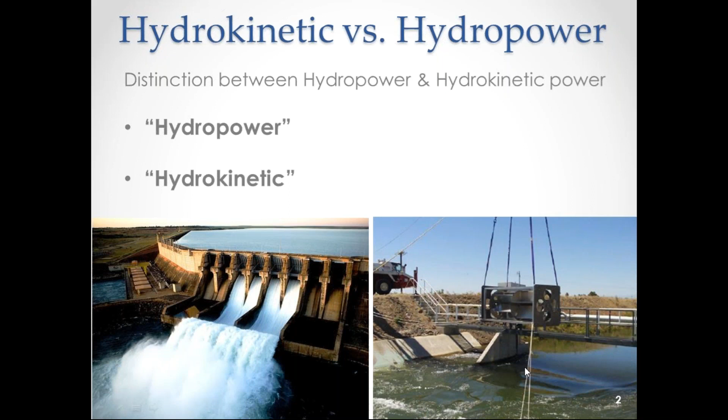That is the potential energy in terms of hydropower, and kinetic energy in case of hydrokinetic. But here I tried to highlight the difference based on structural aspect in order to cover the environmental aspect as well. So guys, we know that to harness hydropower, whether it be a dam or a run-of-river project, we make huge structural changes in the water body and its surroundings. Whereas for hydrokinetic, it's relatively very simple to install. So this is my opinion of differentiating them, but mainly it's based on the conversion of type of energy, that is potential and kinetic energy.

So let's come to the basic theme of our presentation. Hydrokinetic submersible turbines, also called water current turbines, or in some cases in-stream turbines. Though the technology is new, these turbines are getting interest in many parts of the world. Two main areas where hydrokinetic devices can be used for power generation are: tidal currents or ocean waves, a technology that attempts to harness energy from ocean waves or tides; and river streams, ocean currents or canals, a technology that attempts to harness energy from river currents and streams. Although both use similar technology, we will focus mainly on river stream current.

As we know, the history of harnessing the natural power of a running stream is quite old, when people used to grind grains, and later on for electricity production for many years. Anyways, our focus in this presentation would be on rivers.

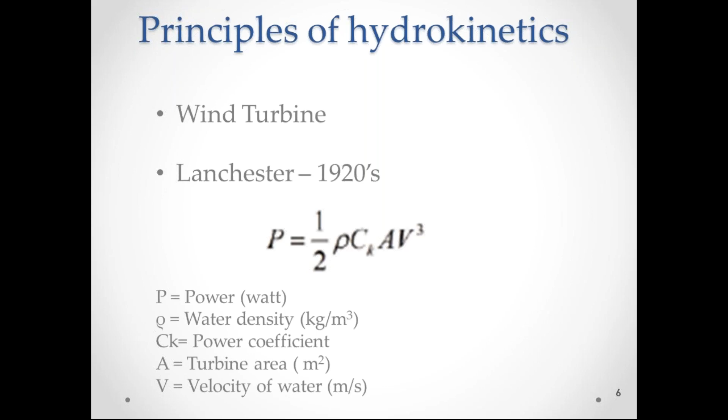Well, let's discuss a little about the technology and conversion approaches. Several hydrokinetic conversion concepts have been developed over the years. The two most common small-scale hydrokinetic turbine concepts are axial flow turbines and cross-flow turbines.

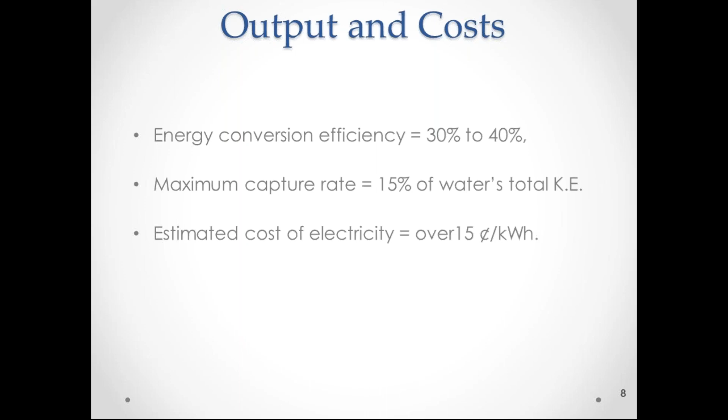In comparison to many other technologies, particularly renewables and green energies, hydrokinetic turbines have more benefits with lesser environmental impacts. In terms of output, hydrokinetic is a more predictable source of energy than wind power. No retaining structure is required for installation of hydrokinetic turbines. Similarly, very few or almost no civil engineering works are required.

These turbines are discreet or even invisible due to their components being near total or fully immersed. There are zero greenhouse gas and atmospheric contaminant emissions associated during installation as well as operations. There is no major habitat modification, including benthic organism habitat. Similarly, no considerable modification of vegetation and possible impact on aquatic fauna is noticed. Small environmental impacts are seen over the facility life cycle.

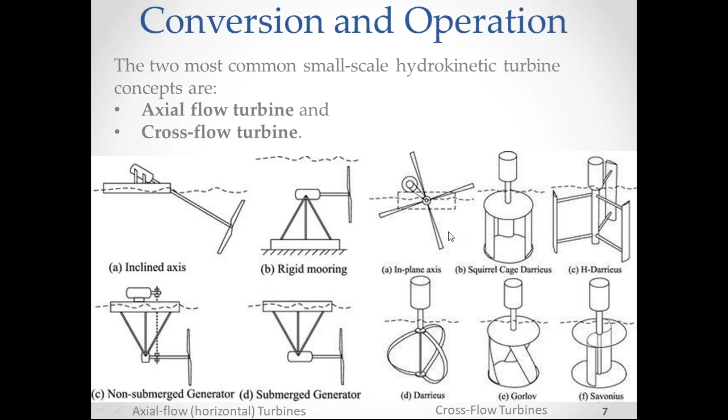Please. Sir, actually, in my fourth slide, I mentioned this point as an opportunity for our region. In fact, this would be sort of my recommendation for SAARC member states. As I mentioned, SAARC member states, like any developing countries, can manufacture and implement the technology to supply needed electricity to their small communities and villages, in case of off-grid options or domestic supply. So obviously it is indeed the most attractive part of this opportunity.

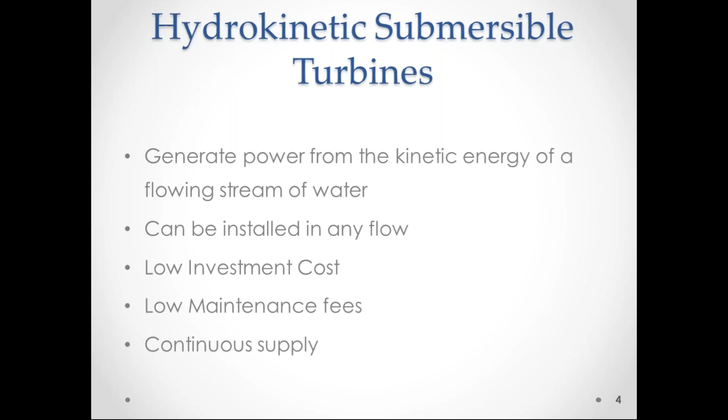And it has no rocket science, it's a very simple concept. The same small hydrokinetic turbines which we use for potential case, we can use with small modifications, as at the same time, as I mentioned, it's basically the same as wind turbines except for the density difference. So you can simply say that if you put a wind turbine in a canal, it can give you this opportunity, although that's not a logical solution, just to make a case.

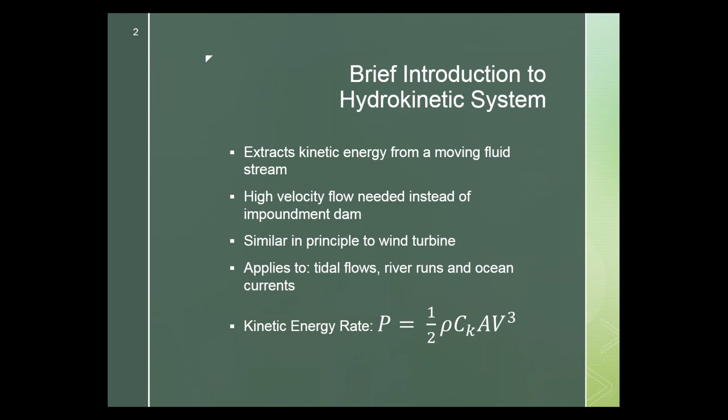When the turbine is submerged into the water, the flowing current turns the turbine, and the coupled generator rotor spins along with the turbine shaft. If an induction machine is used as a generator, then a gear is also required between the generator and the turbine to produce the corresponding frequency during lower water speeds. The gear is needed because the flow of the water is lower than that required for generation of electricity, so a gearbox is coupled with the generator to make use of the lower speed of the water stream.

However, a permanent magnet synchronous generator is usually connected to kinetic turbines because it does not need a gearbox and can be connected directly.

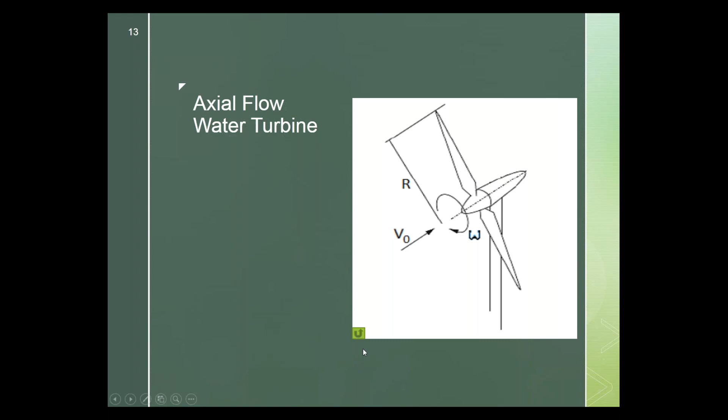Within the axial flow turbine, there are further classifications such as inclined axis or horizontal axis. The inclined axis turbine has mostly been studied for small river energy conversion applications.

In both axial flow horizontal axis and cross flow axis turbines, the sweep area tends to be relatively small compared to the total dimensions of the device. But in the inclined axis turbine, the sweep area of the rotor blades is increased by giving an inclination to the turbine rotors. If we expand the size of the turbine, it would lead to considerable increase of the supporting structures and structural strength at the root of the horizontal axis turbine, increasing the overall cost of the system.

Therefore, in the inclined axis turbine, the turbine's axis swings across a pivot on a supporting structure or on a float. This option reduces the cost, and because of the higher swept area of the rotors, it gives better efficiency as well.

The inclination angle of this turbine is passively adjustable to the stream speed, determined by the balance of hydrodynamic forces, buoyancy, and weight of the turbine. For maintenance, the turbine axis swings near the water surface by being pulled up at the lower end using a cable outside the system. This is easy to use, but it is mainly used for very small power generation applications, so large inclined axis turbine systems are not possible.

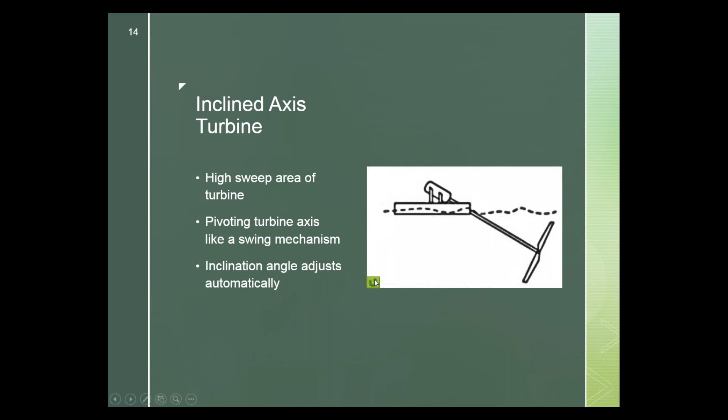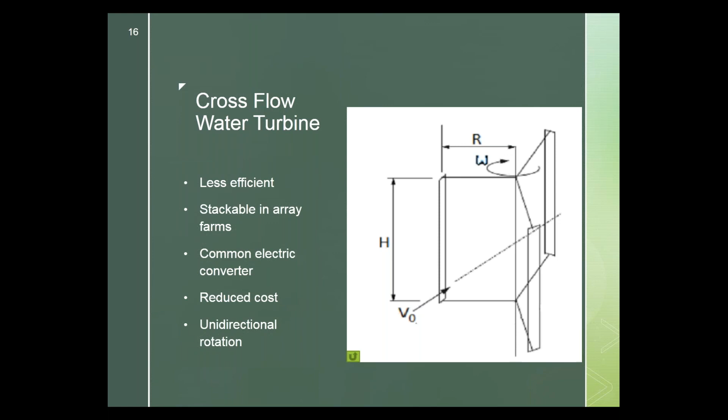However, some advantages also exist. For example, compared to axial turbines, cross-flow turbines can rotate unidirectionally even with bidirectional fluid flow.

Within the cross-flow turbines, there are in-plane axis and vertical axis cross-flow turbines. So I would be giving a very small, brief overview of these turbines, and then I'll be finishing my presentation. These cross-flow turbines can be divided into the vertical axis, in which the axis is vertical to the plane of water, and the floating and in-plane axis. So this turbine is the in-plane axis, in which the axis of the turbine is on the horizontal plane of water surface, while these are vertical axis.

The rest of these are vertical axis turbines, where the axis of the turbine is vertical to the plane of the water. These are mainly drag-based devices and inherently less efficient than their lift-based counterparts. The large amount of material usage is another problem for such turbines. Darrieus turbines with the in-plane axis may also fall under this category. In the vertical axis domain, Darrieus turbines are the most prominent options, even though examples of H Darrieus or squirrel cage Darrieus are rather rare. But instances of Darrieus turbines in the form of curved blades are also being used in hydro applications.

The Gorlov turbine is another member of the vertical axis family, where the blades are of helical structure. Savonius turbines are another example, which are drag type devices, which may consist of straight or skewed blades. These turbines may also be classified based on their drag and lift of the blades, their up and down flow orientation of the rotor, and fixed or variable pitching mechanism of the blades. Different types of rotors may also be converged to make a hybrid, such as a Darrieus Savonius hybrid, in order to achieve a specific performance feature.

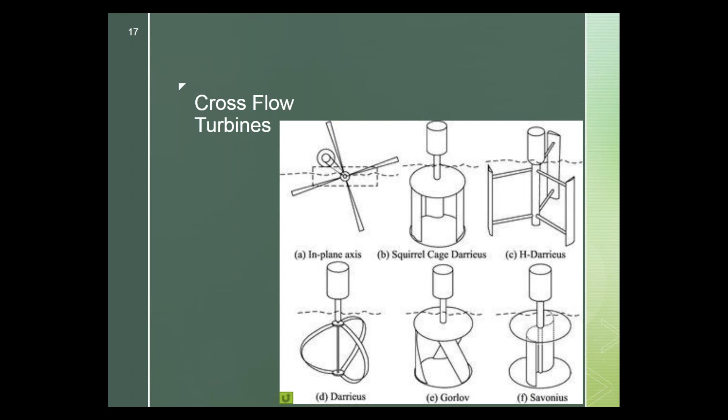So with this, I would be ending my presentation. We still have some topics to cover, which is regarding the augmentation of the turbines through ducts and diffusers, the most viable turbine option, types of system generator for hydrokinetic turbines, and then finally the different technologies which exist in the market currently. So hopefully we would be going through that later in whatever slot I get to present to you guys. So thank you very much, and over to you, Mr. Hassan.

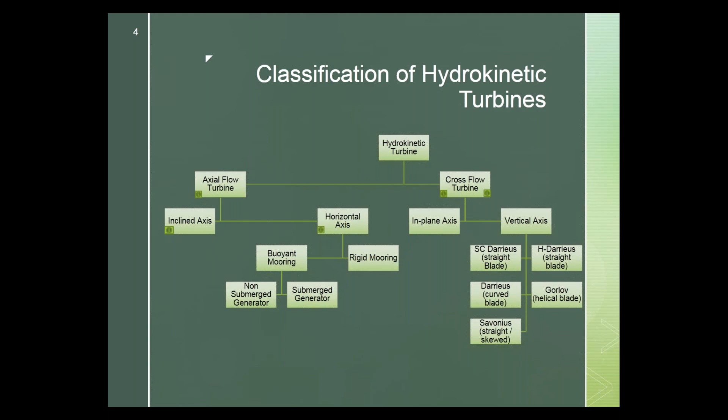Thank you very much, Umar Saab, for your very nice presentation. Mr. Umar has briefly touched on the technical formulas and the types of hydrokinetic submersible turbines, giving an analogy to the wind turbines, and it was very interesting to see how this formula of wind turbine is also working similarly on this technology, with the density difference being the part. Then he has also touched on the structures of hydro submersible turbines with generators and specific parts. And lastly, he has covered the classifications of the different hydrokinetic turbines available.

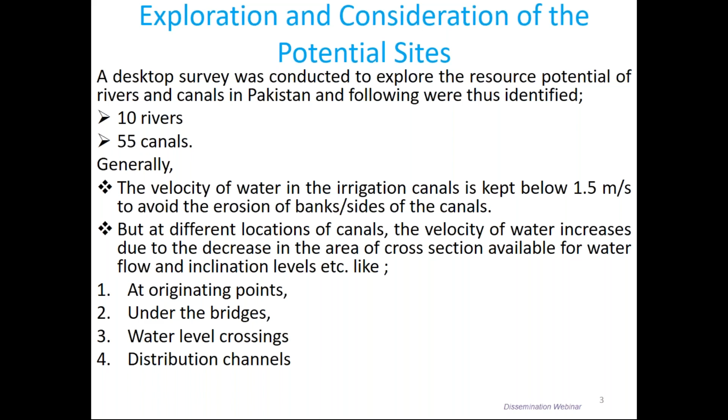But at different locations of canals, the velocity of water increases due to the decrease in the area of cross section available for water flow and inclination levels, etc. Like at the originating points of canals, under the bridges, water level crossings, and distribution channels. Those points are typically most suitable for the extraction of this energy through hydrokinetic turbines.

So, going through this desktop survey, we came to the decision that the Ghazi Brotha power canal originating from Ghazi town near Tarbela Dam was the top of all 55 canals and rivers we came across. Here we can see the beautiful view of this canal, because this canal has been designed for the purpose of potential energy extraction from the water available in Tarbela Dam, and they built this water channel, and 1450 megawatt energy is being extracted through this channel.

Now we look at the parameters of this canal. Water flow velocity in it is 1.8 meter per second, which is useful and comes into the range of water velocity which is good for most types of turbines. And depth of this canal is 9 meters, which is also a very good depth, and up to 8 meter height of turbine or blade area can be accommodated in this canal. And the width of this canal is 100 meters, which is also very good, so that in line we can install many turbines. And length of this canal is 52 kilometers.

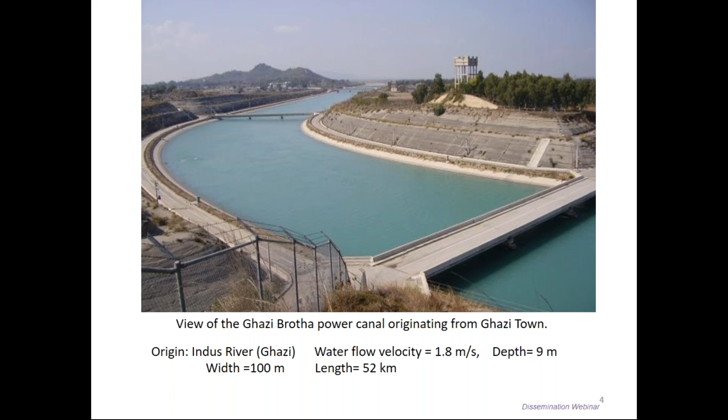And that is all with uniform parameters, uniform laminar flow of water in it, and always constant flow, constant velocity, and all guarded across. Both sides of this canal have road access and very good infrastructure available for any project. So we consider this the best available resource in Pakistan.

The second canal we came across was Upper Jehlum Canal. This canal has the following parameters, which are not ideal, but the second level after the Ghazi Brotha Canal. It originates from Mangla Dam and runs for 127.4 kilometers. The water flow velocity in the main canal is approximately 0.9 meter per second. And depth of this canal is 2.86 meters. And width of this canal is 68.6 meters. So this canal also has very huge potential.

The velocity in the main canal is not very good, but can be utilized, as earlier we discussed that under the bridges, originating points, and distribution channels, the velocity of water increases, and that can be utilized accordingly.

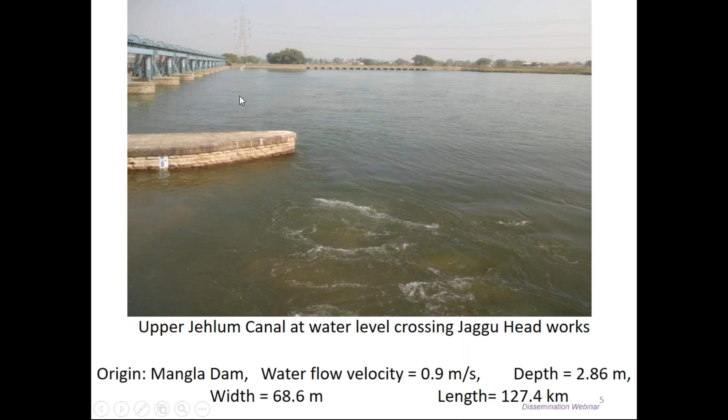And our third canal we came across during the survey was Machai Canal, which is located near Mardan in KPK province. And this canal is also very good, having a lot of kinetic energy in it, and generally in the main flow the velocity of water is 1 meter per second, and depth of the main canal is 2 meters. Width of this canal is 6 meters, and it runs for 42 kilometers.

But as we earlier discussed, in the consideration of the canal design, to avoid erosion of the banks and sides of the canals, the velocity of water is kept below 1.5 meter per second so that it remains safe and the sides of the canals may not be damaged.

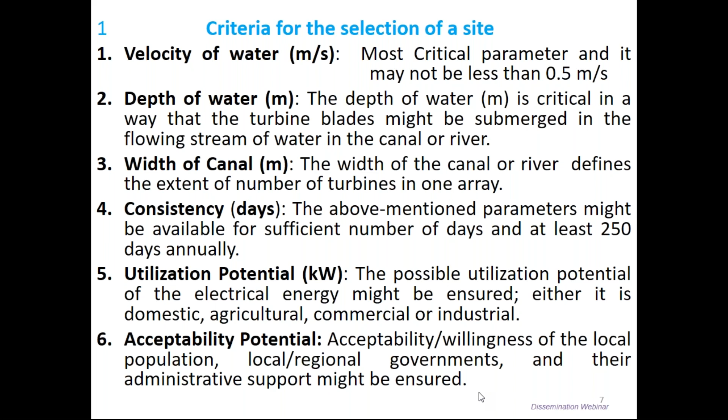Number six, acceptability potential. Acceptability or willingness of the local population or local regional governments and their administrative support might be ensured. Number seven, approachability. The approachability to the potential site for the manpower and machines should be ensured.

Number eight, security threats. Security threats involved, if any, during construction and for the life cycle of the plant might be assessed, and as a counter action to safeguard, the required mechanism might be explored accordingly. Number nine, grid connectivity. The available infrastructure near the potential site for the grid connectivity or transmission lines for the end users might be ensured or planned.

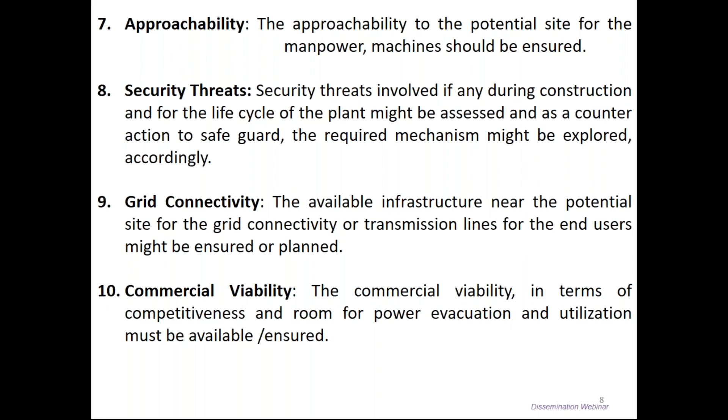Number 10, commercial viability. The commercial viability in terms of competitiveness and room for power evacuation and utilization must be available or ensured. So by considering all the parameters, we can make the decision which one is the best available source for the installation of a turbine or a project for hydrokinetic energy extraction.

Doctor, excuse me, can I intervene? Doctor, my request to you is please be a little bit swift in going through your presentation because we are very behind the schedule and we unfortunately would not have enough time for the question answer session. So could you just quickly, briefly go through your presentation? Okay.

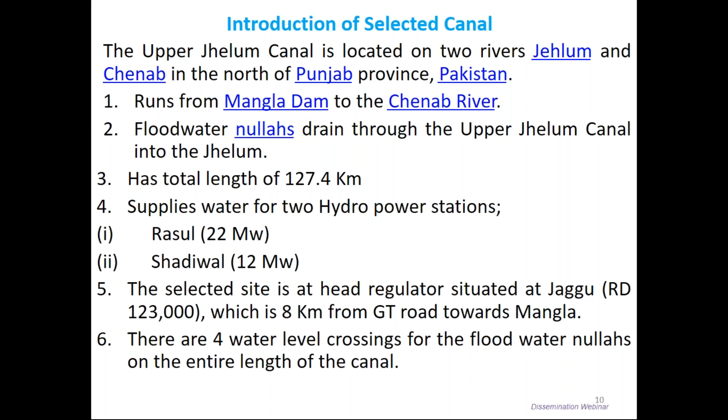And the selected site is at the head regulator situated at Jaggu RD 123000, which is 8 kilometers from GT Road towards Mangla. And there are 4 water level crossings for the flood water nullahs on the entire length of the canal. So this is the site, the exact point where we have a potential and we can install the submersible turbine.

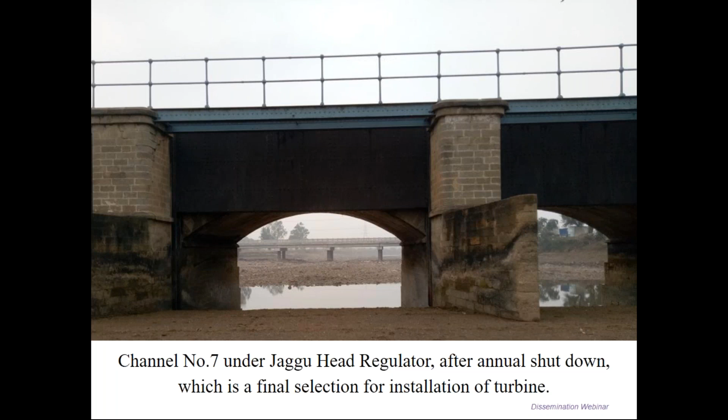This is Jaggu level water crossing, and this is the exact channel which we have selected for the installation of the turbine. This is channel number 7 under the bridge, and there are 17 channels under this bridge. Now, description of the selected site. The canal is Upper Jehlum Canal, channel number 7 under the bridge.

Velocity of water, main flowing stream under the bridge, is 1.08 meter per second, and velocity of water over the slope under the bridge, which is nearly 30 degrees, is 3.6 meter per second. Depth of water over there is 1.1 meter, and consistency available is 335 days.

So assessment of the possible utilization potential of the electrical energy is: there is a building of this head regulator monitoring station over there, which is a 3 kilowatt electrical load, which can be utilized accordingly.

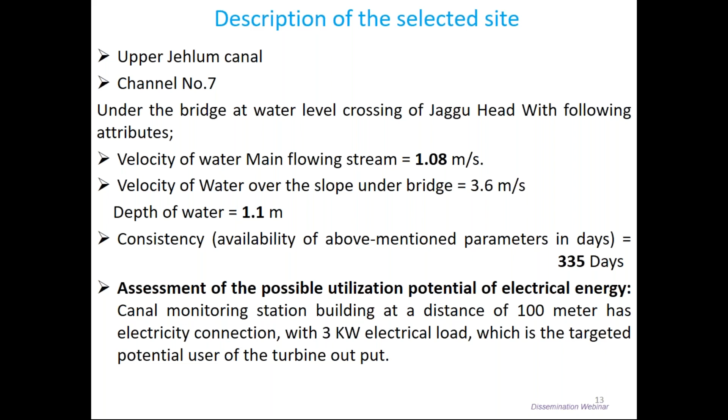Assessment of the acceptability potential of the local population is also there, because both sides of the canal are thickly populated, and they are eagerly wanting an uninterrupted source of electrical power, and they will be happy to get a solution like this.

Approachability is also good, because there is maintenance infrastructure, metalled wide roads, associated staff, thickly populated area around, and a good network of roads, and every facility is there. So it could be good for the installation of this turbine and this project.

As for threat, no threat is there, because the area is very good and under control through security agencies, and 220 kilovolt grid lines are also available along the sides of this canal, so this parameter is also satisfied.

So we selected this site so that we can demonstrate the technology and attract stakeholders from government, local population, investors, end users, and academia, so that we can demonstrate and kickstart this technology and utilize this huge potential which is available in Pakistan and rest of the member states of SAARC and throughout the globe.

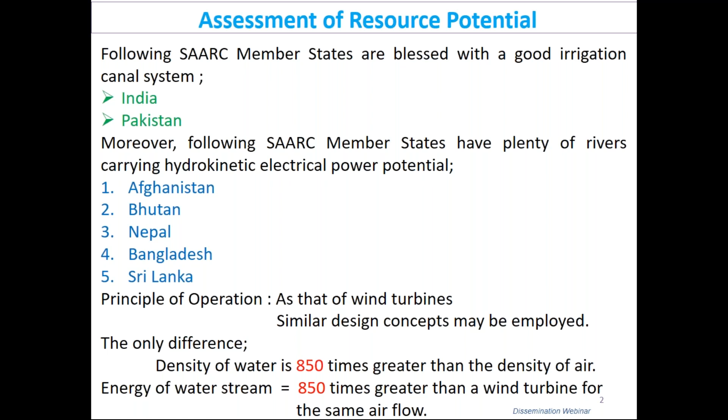As we have discussed, the following SAARC member states are blessed with a good irrigation canal system. First of all is India, then Pakistan. Moreover, the rest of the SAARC countries like Afghanistan, Bhutan, Nepal, Bangladesh, and Sri Lanka also have plenty of rich resources for hydrokinetic energy available for extraction. As said earlier in previous lectures, the principle of operation of hydrokinetic turbines is similar to wind turbines. The only difference is the density of air and water - water is 850 times greater than the density of air. So the resource in water is 850 times greater than a wind turbine for the same airflow or water flow.

Now we will consider first the types of resource potential. First is theoretical potential, second is technical potential, third is economic potential, and we will go through all of these one by one.

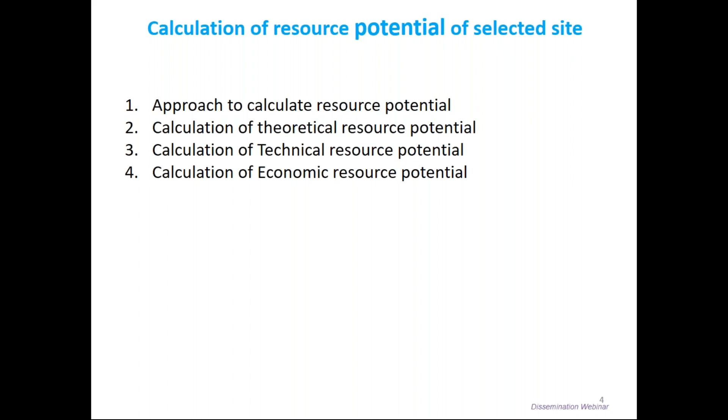First is the calculation of resource potential of selected site, and we will consider the approach of how we will calculate it. Then the calculation of theoretical resource potential, third is calculation of technical resource potential, and number four is calculation of economic potential. We'll go one by one.

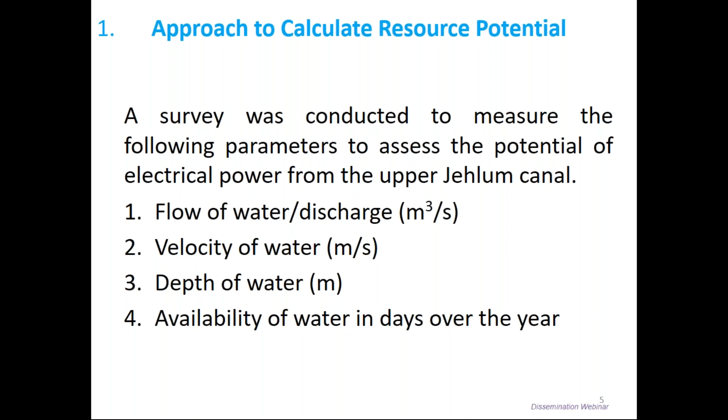First, the approach is that a survey was conducted to measure the following parameters to assess the potential of electrical power from the Upper Jehlum Canal: flow of water discharge in meter cube per second, velocity of water in meter per second, depth of water in meters, and availability of water in days over the year.

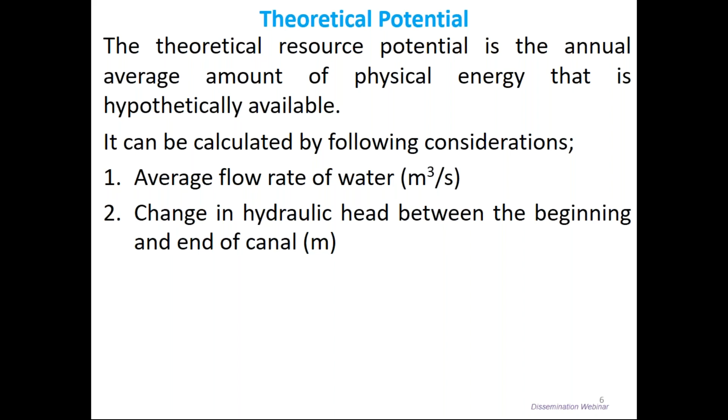Now, what is theoretical potential? The theoretical resource potential is the annual average amount of physical energy that is hypothetically available. It can be calculated by the following considerations: average flow rate of water in meter cube per second, and the change in hydraulic head between the beginning and end of the canal as the points of consideration.

Now these are the existing parameters of Upper Jehlum Canal, and the canal has been divided into two sections because both sections have different parameters, and we will discuss one by one. First section is from starting to 74.4 kilometers, and the second section is 74.4 to 127.4 kilometers.

The discharge rate in the first section is 212.376 meter cube per second, and in the second section it is 116.09. The bed width in the first section is 69.54 meters, and in the second section it is 65.5, a little less than the first section.

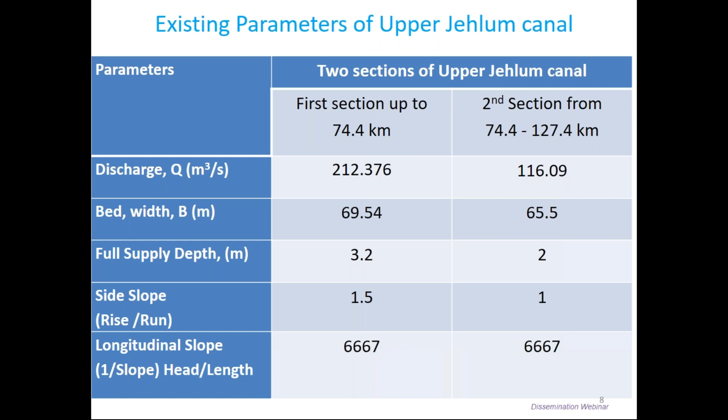We have an expression for this: theoretical power equals gamma multiplied by Q multiplied by delta H, where gamma is the specific weight of water, that is 9789 Newton per meter cube at 20 degrees centigrade, Q is the flow rate of water in meter cube per second, and delta H is the change in hydraulic head between the beginning and end of the canal. The length of canal is 127.4 kilometers for both sections.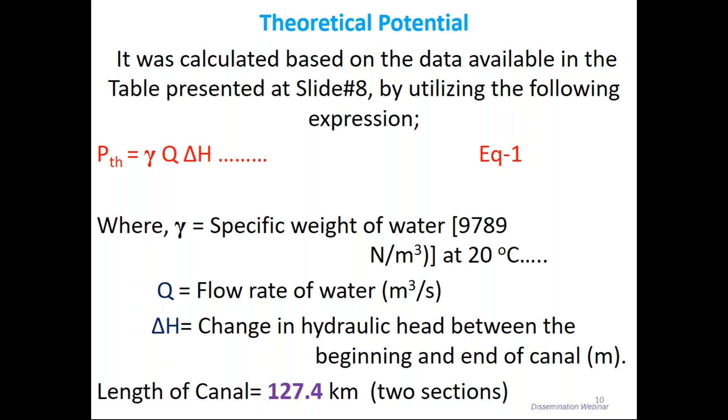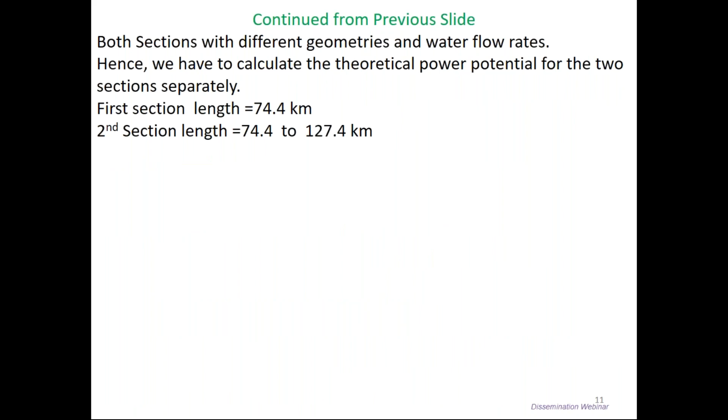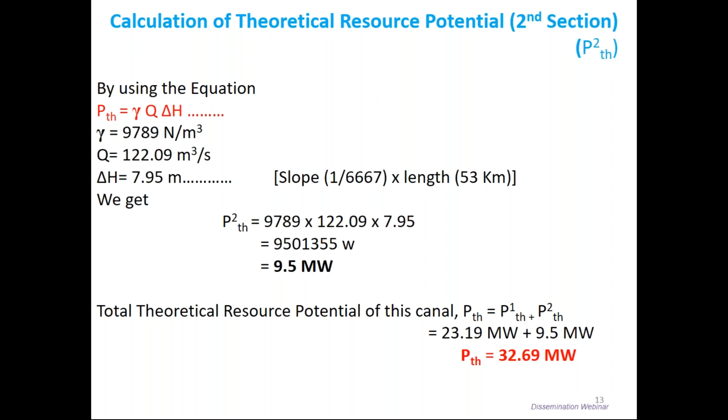Both sections have different geometries and water flow rates, hence we have to calculate the theoretical power potential for the two sections separately. By putting the values in the equation, the theoretical power we get is 23.19 megawatt in the first section. Similarly, by putting the respective values in the same equation, we get 9.5 megawatt in the second section. If we sum up these two, we get 32.69 megawatt, which is the theoretical potential of this whole canal, including both sections. Now we will go for the technical potential.

The technical resource potential is the portion of a theoretical resource that can be captured and converted into electricity using a specific technology. It can be calculated by following considerations.

Number one, velocity of flowing water stream. Number two, width of canal or river. Number three, depth of water. Number four, rotor diameter of the turbine. Number five, inter-turbine spacing in the arrays. Number six, distance between two arrays. Number seven, availability of resource in days. Number eight, system and topographic constraints. Number nine, land use constraints. Number ten, system performance and temperature of water.

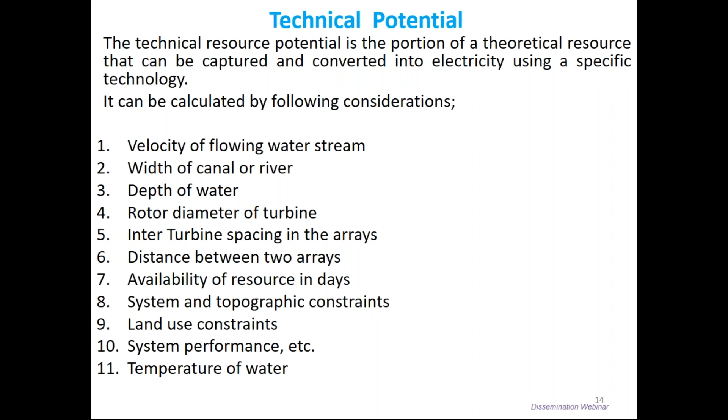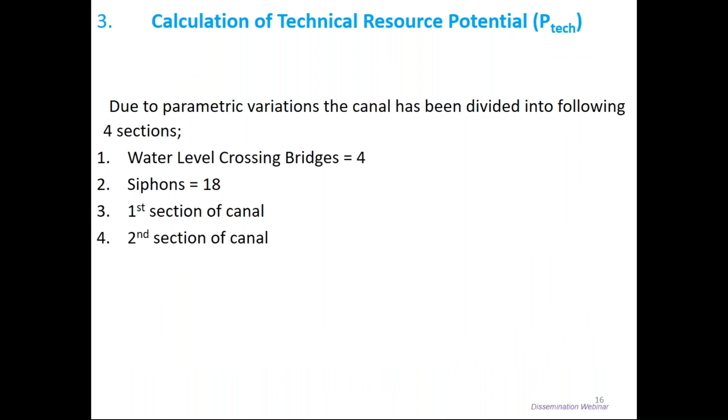Coming to the calculation, we have to calculate the technical potential for 136 turbines. If we consider the characteristic curve of this turbine, we see that the starting velocity is 0.75 meters per second, and at a velocity of 2.9 meters per second, the curve achieves maximum power and then becomes stable. So 5 kilowatts can be achieved after 2.9 meters per second for this turbine. The power produced from these 136 turbines under the bridges can be calculated by multiplying 136 by 5, that is the maximum power since the velocity is available for that. So the total power may be 680 kilowatts.

Now considering the losses in cascading and transmission, supposing it may be 10%, we have 68 kilowatts of power that may slip away. So in this way, we can get 0.612 megawatts of power out of these 4 bridges by the installation of 136 turbines.

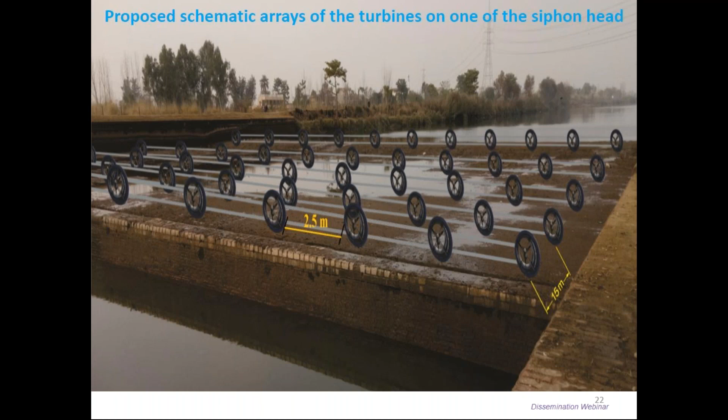So this is the siphon, and the arrangement of turbines over the siphon. It may not be exact, because we have to shift the center of one turbine relative to the next row, but this just gives you an idea of how the turbines can be installed this way.

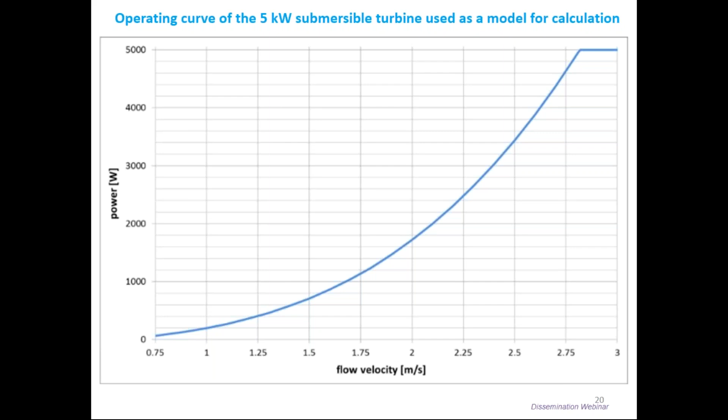So by using the proposed model turbine we have seen so far, rotor diameter is 1 meter and maximum power is 5 kilowatt. So reference the characteristic curve of this turbine in the previous slide. Yes, we can see here that at this velocity we can have around 200 watt, because it is the starting point of this turbine from where it starts working. So the output may be low, but for the calculation purpose we use this model turbine. So the expected power from this turbine may be 200 watt.

So total power from this siphon can be 200 multiplied by 2052 watt, that is 410 kilowatt. So losses in cascading and transmission at the rate of 10%, that may be 410 minus 41. So 369 kilowatt may be the output power from this siphon, and the total power may be 0.36 megawatt.

Now we come to the technical potential in the first section of main canal. The designation is PM1 technical. So technical potential of the canal of 74.4 kilometer area, the first section of this canal. So velocity of flowing water is 0.91 meter per second. Width of canal is 68.62. Depth of water in canal is 2.86. Number of turbines proposed in one row is 68.62 divided by 2.5 plus 1, that is 3.5, maybe 19. So proposed distance between two rows is 30d, because here the velocity is less. So 30 into 1, d is the diameter of the turbine.

So 2480 are the number of rows in the length of 74.4 kilometer, or 74,400 meters. So number of rows missed by roads and bridges at the rate of 10% may be 248, and number of rows accounted for in siphons, that is 6 rows multiplied by 9 is equal to 54, because we have considered 9 siphons in the first section and 9 in the second section. So in this way, number of rows accounted for under bridges is 4, and net number of rows in this canal area may be, by adding up 248 plus 54 plus 4 and subtracting it from the total number of rows, that is 2480. So we get 2174 number of rows in this canal area that can be counted for the installation of turbine.

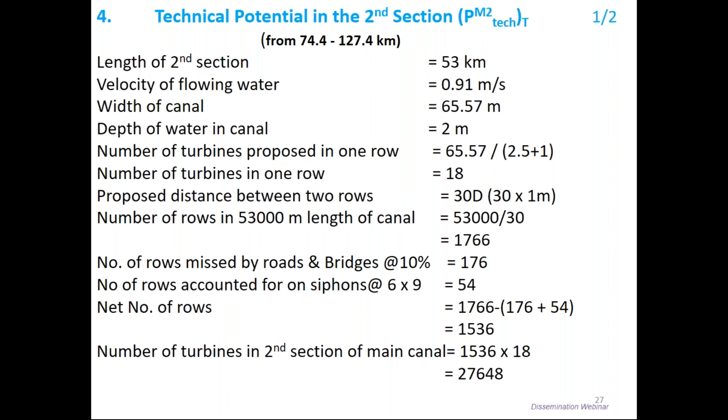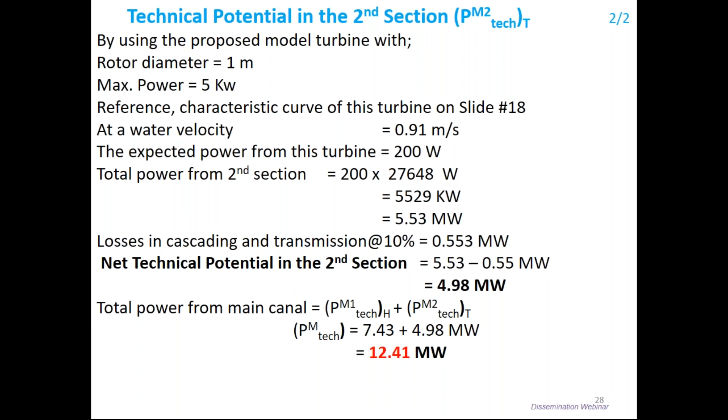So number of turbines in second section of main canal becomes 27648. So by using this same turbine, we get the power in the second section is 200 multiplied by these number of turbines, that is 27648 watt, and it becomes 5529 kilowatt, and as a total it may be 5.53 megawatt. So losses in cascading and transmission at the rate of 10% is 0.553 megawatt. So net technical potential in the second section is 4.98 megawatt. Now total power from main canal, adding up these two sections, PM1 and PM2, that is 7.43 plus 4.98 megawatt. So it becomes 12.41 megawatt in the main channel.

Now by adding up the power produced from all the four sections, we get 0.612, that was under the bridges, and 0.36 megawatt, that is on the siphons, and 12.41 megawatt, that is in the main sections of the canal. So net resource potential of this canal becomes 13.38 megawatt. So this much power can be supplied, if we consider at the rate of 2 kilowatt, to the villages around the canal.

So 2 kilowatt may be good enough for a small house in villages. So 6,691 houses can be given power from this resource. And if we give to cottage industry at the rate of 20 kilowatt, then 669 cottage industries can be furnished. And if we give the power to the tube wells, then at the rate of 20 kilowatt to each tube well, 669 tube wells can be facilitated through this electrical power produced in this canal through kinetic energy.

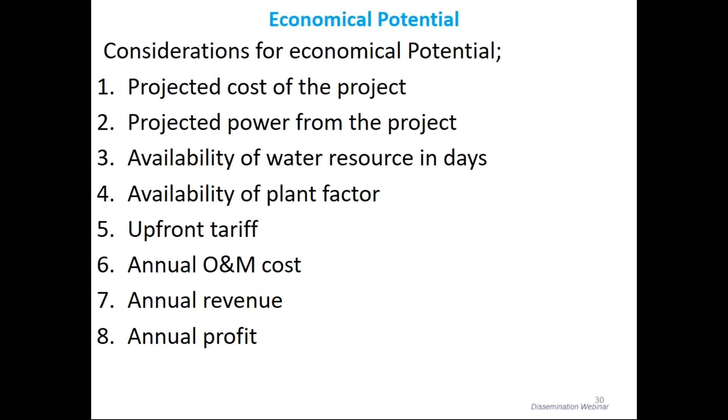Now we consider the economic potential by considering number one, projected cost of the project, number two, projected power from the project, number three, availability of water resource in days, number four, availability of plant factor, number five, upfront tariff, number six, annual O&M cost, number seven, annual revenue, number eight, annual profit.

Now, as we have calculated the projected power from the upper Jhelum canal, that is 13,380 kilowatt, if we multiply it with 24 hours, that is kilowatt hour. If we multiply with 24 hours, then it becomes this figure, that is 13,380 multiplied with 24 into 300 days, because for 300 days this much power may be available. So for microhydro power plants by NEPRA, the tariff has been given, that is 12.7 Pakistan rupees per kilowatt hour unit. So by multiplying this figure with this, we can get

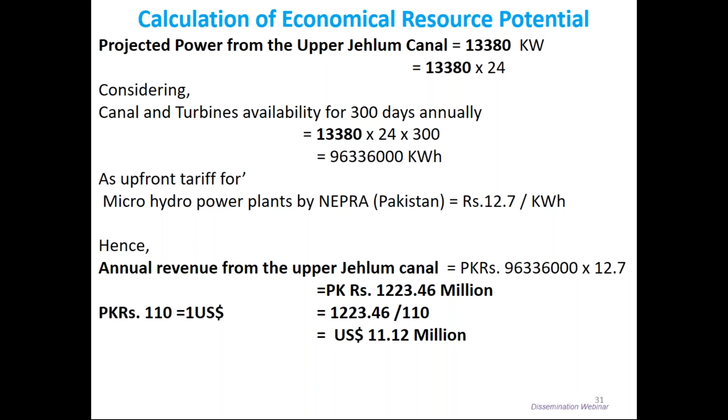1223.46 million Pak rupees. And if we convert into dollars, presently $1 is equal to 110 Pak rupees. So by this we get 11.12 million US dollars. So this much potential can be harnessed through this canal. For hydrokinetic power plants, the average equipment cost for these small turbines is from $3 to $4 million per megawatt. So if we are going for megawatt, it may be $4 million.

The project cost at the rate of 50% of the equipment cost, because for transportation, installation, infrastructure, and all these adding up, it can be 50% of the equipment cost. So by having this, we can have the installed cost of the project, that is 13.75 into 4 into 1.5 million. So it becomes 82.5 million US dollars. Annual O&M cost of the project may be 2.4% of the project cost. So in this way, we can have US dollar 1.98 million of O&M cost.

So annual net profit may be 9.14 million US dollars, and if we convert into Pakistan rupees, that may be 1005.4 million. So the economic resource potential of the canal may be 1004.5 million, and total cost of the project divided by annual net profit, we can get the payback period, that may be 9 years, which is a reasonable period over the project life cycle.

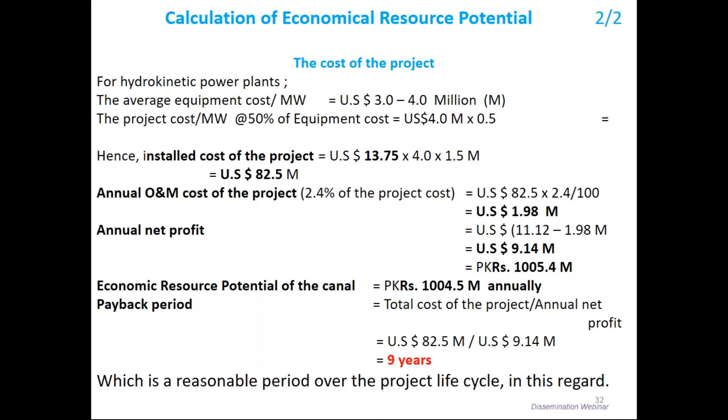Now, we have just used a simple generic model for the calculation of hydrokinetic resource potential of any site by using the same equation and putting the equation in Excel format. We can easily get how much theoretical potential this site or this canal can give us. Then similarly, the economic resource potential can be calculated: how much kilowatt we have multiplied by 24 hours, or how many hours are available, and D is the number of days, and the tariff, that is 12.7 here. It can vary from site to site, and in this way we can get the total economic potential.

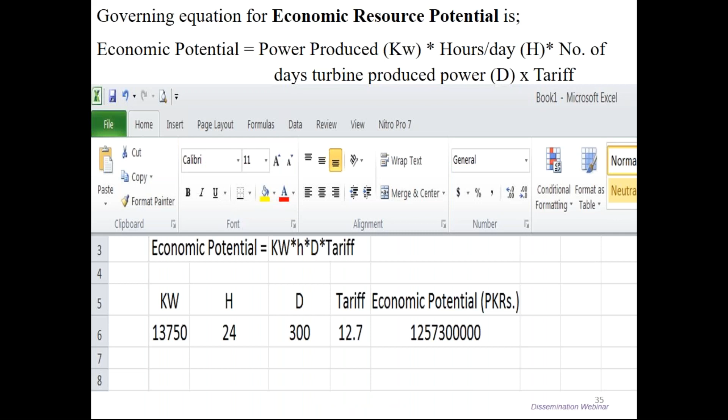Thank you, Dr. Saab, for your very informative presentation. Dr. Saab, in his presentation, has briefly touched three very important aspects of the project, which include theoretical, technical, and economical potential. On the theoretical potential side, Dr. Saab has given an overview of the selected sites' theoretical potential. Then based on the equation, Dr. Saab gave a certain figure for the whole canal which was evaluated, something in the range of 30 megawatt.

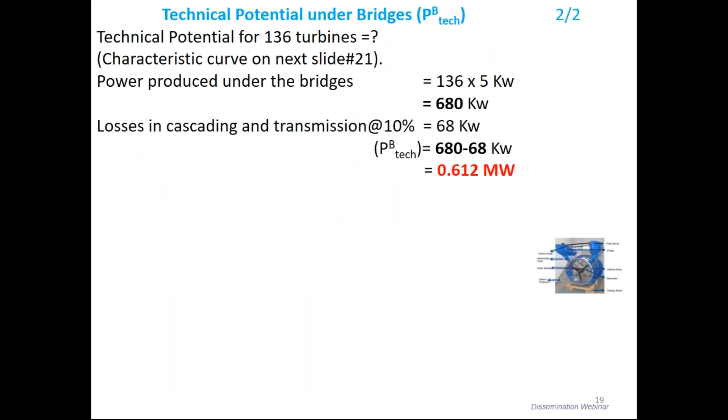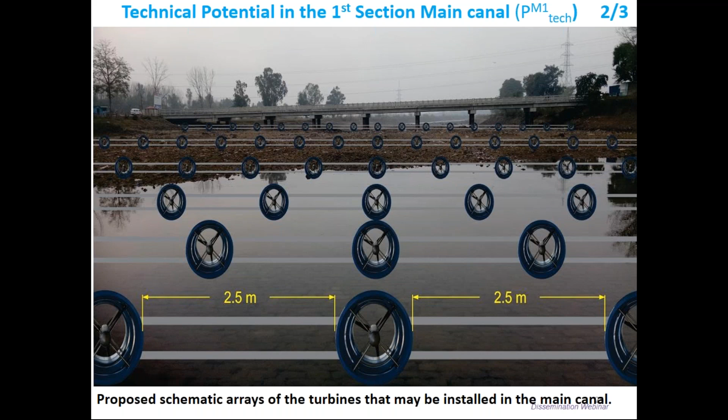Then on the technical potential side, Dr. Saab has referred to a turbine by Smart Hydro manufactured in Germany. And then Dr. Saab has given four very important aspects of the technical potential of the canal, including under bridges, the two sections of the canal, and the siphons. Then lastly, Dr. Saab has touched the economical potential of this canal, which to my understanding comes nearly in the range of 8 to 9 years.

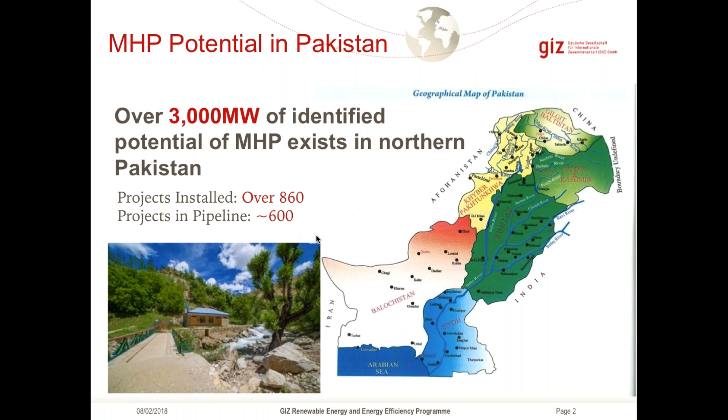In the next slide, you can see the existing known information we have available. PEDO, the Pakhtunkhwa Energy Development Organization from KPK, has recently initiated implementation of 356 MHPs, covering 12 districts of KPK. They have chosen 7 implementation NGOs, and more or less they have already completed this project.

EU is also implementing 240 MHPs in KPK, through SRSP. Then there is CDM, Clean Development Mechanism, which was initiated together with PPAF and World Bank funding, choosing an implementation NGO like AKRSP - they have installed many projects in Gilgit, Baltistan, and Chitral. KFWO and PPF are also implementing another type of project, 5 MHPs in 3 districts of KPK.

They have chosen 3 implementation NGOs: SRSP, AKRSP, and others. There is also a new project initiative that PEDO is planning, funded by ADB, with 672 projects to be installed in 19 districts of KPK with the same implementation NGOs. There are many other projects too, but these are the known ones we are working with; there are also private, NGO, and other small existing projects.

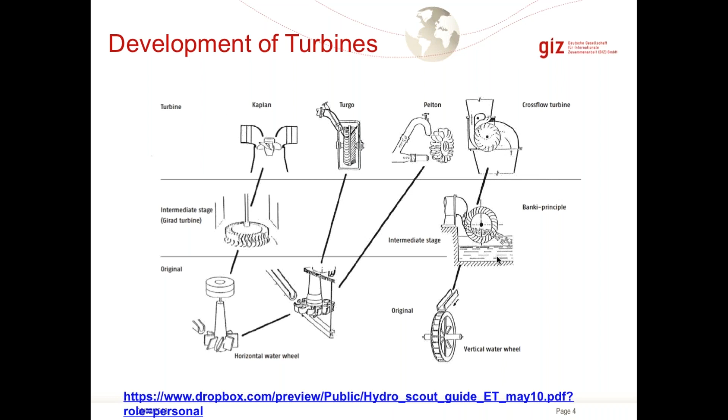For the next step, turbine selection is based on head and suitability in terms of performance. The Kaplan is a low head turbine, and cross flow is a medium head turbine. Cost effectiveness and efficiency vary from time to time.

There is another turbine known as the Pico cross flow turbine. It's a very small kind of turbine, about 1 or 2 kilowatts, suitable for low head and also for canal falls.

Propeller turbines and Francis turbines are widely used internationally, and sometimes people import them into Pakistan since Francis turbine technology isn't available here. Pelton turbines are used in the Skardu and Baltistan region, where water flow is very low but the head is very high. People try to develop their own technology through reverse engineering, but they still suffer from low efficiency, even though they still get some output power.

The last type is the kinetic submersible turbine, which uses the kinetic energy flow of water. It should have a flow greater than 2 meters per second to be good. But in Pakistan, there are very few such technologies available, so you have to import them from outside the country, which costs double or triple.

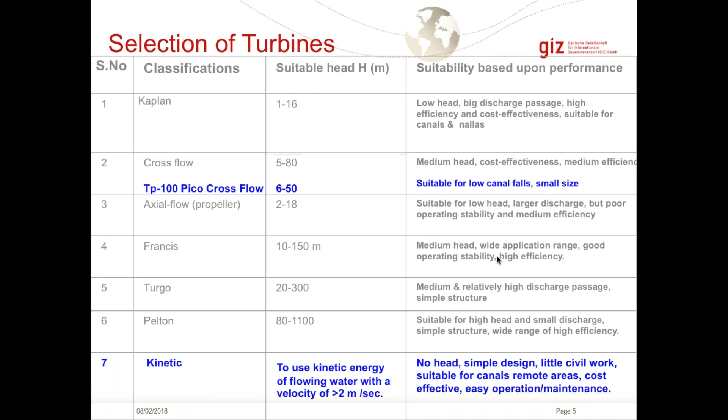I'll give a simple example of the Pico crossflow turbine. As you can see, this turbine is easy to install in a small canal, and the whole slide gives almost all the information useful for a project developer.

Similarly, we wish that for the other types of turbines, the submersible turbine and the kinetic turbine, similar brochures, materials, or slides could also be produced for dissemination purposes.

Usually university students do this kind of research project, and it is very useful for them.

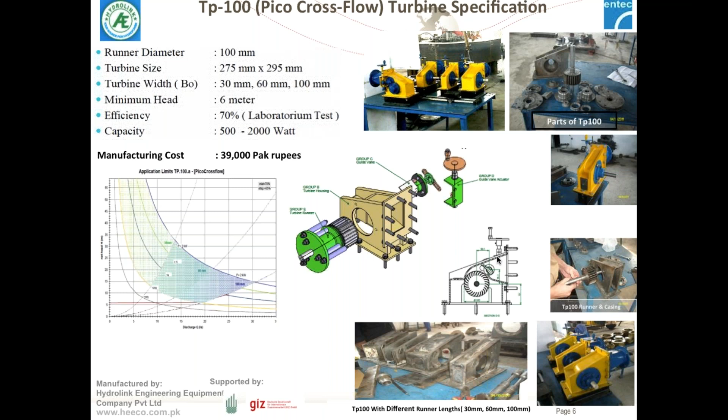As a next step, regarding our role, GIZ's role in promotion of hydropower: at the request of our partners, we have initiated some pilots for utilization of surplus electricity from the MHPs for economic development, which is called productive use of renewable energy.

We observed that there are overall quality aspects issues of MHP's development, which has become a challenging task for the project developers, equipment supplier, and community operators who do not have sufficient technical and management capacities to ensure sustainable electricity generation from the MHPs.

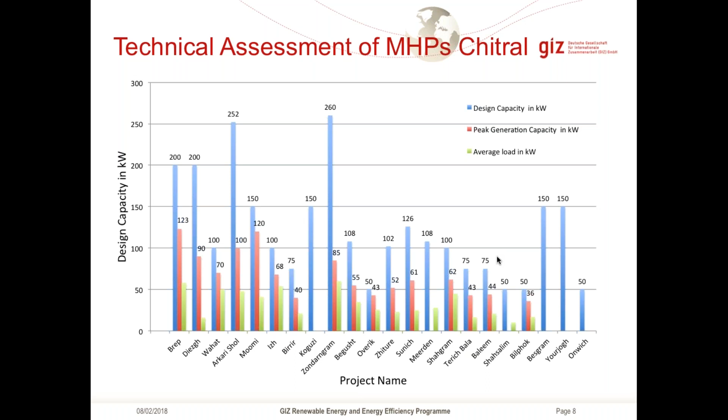So these are all the sites covered in the Chitral area. There are a few sites which you will be surprised about, where the capacity shown is very high, but actual testing and other things revealed it produces very less output power. This means that the equipment was not working very well—maybe the turbine is having issues, or water is less, or the design and other parameters are at fault. Meaning to say, there are issues we have seen, and we have shared them with the partners. Then the things quite improved, getting improved.

So these are the graphics. You can also see the hourly load curve here, within 24 hours of load. In summer season, this is the first site, the 200 kilowatt Brep MHP load curve. It can generate more than, starting at 12 o'clock midnight, then up to 24 hours, showing different kinds of graphics. You can imagine that in summer there is low demand, but in winter there is high demand because of heating and other loads. I will share this presentation with you so you can easily understand.

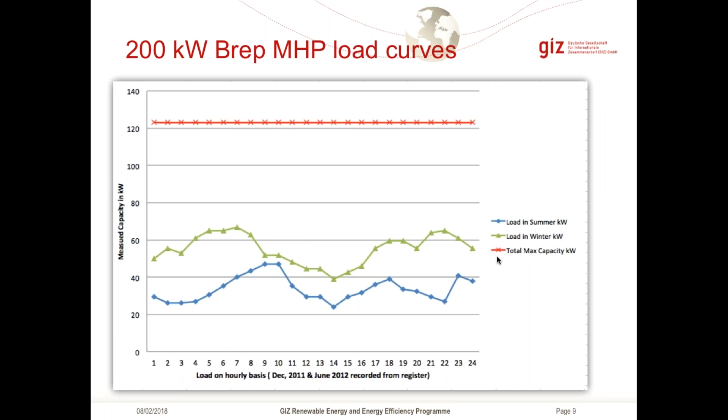The similar kind of technical assessment we have done in the MHP Skardu region. You can see the same kind of result, but it's quite better than the Chitral region. This is one of the sites, a 160 kilowatt MHP site in Dapa Skardu. You can see the detailed analysis—we produced a detailed report, but one of the tables I have taken from the report.

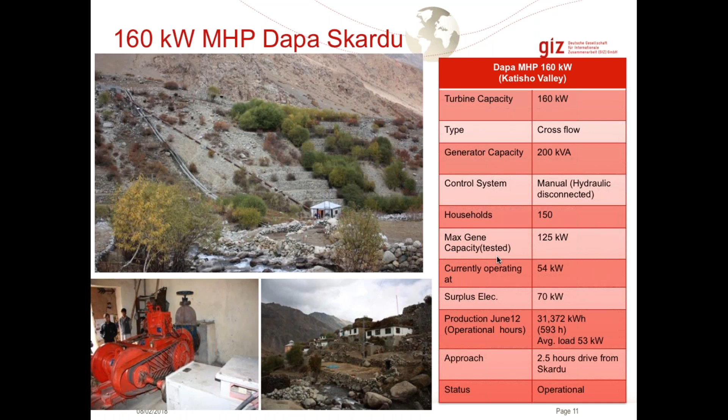From the report, you can see this table that surplus electricity of 70 kilowatt is available from this project. Production in June 2012, when we noted down from the kilowatt hour meter, it was running 593 hours for 1 month, with an average load of 53. Still, you can see there is surplus electricity available. This was one of the best sites in the Skardu region.

So there are common issues observed during MHP assessment: mainly control system not working properly, voltage fluctuation, insufficient installed capacity, some MHPs not operational, transmission and other issues, alignment and vibration issues, and also belts and pulleys, civil structure, and variation in design and parameters.

So after highlighting all those issues, the organization started to adopt the new technology of T15 turbines. They have mentioned in their tender document that they need the certified technology along with an electronic load controller, to supply stabilized electricity, and that has been adopted so far.

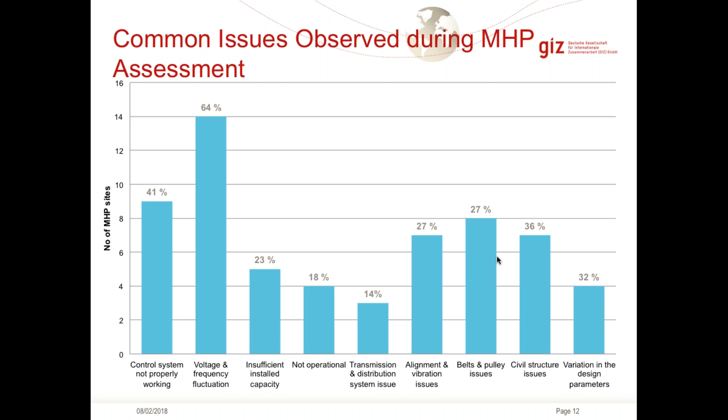I would like to show you some of the success in the T15 cross-flow turbine technology. That was one of the first projects done by SRSP in Kalash Valley, Chitral. It's 100 kilowatt, two turbines installed in Chitral, and both turbines are having a very good output.

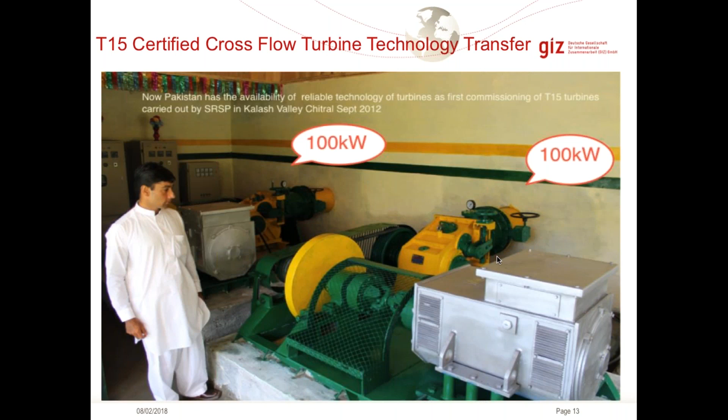We have tested these turbines with our latest equipment, and it was quite a good result we have achieved from these MHPs. They are also using these MHPs for hotels, electricity, and also productive utilization.

Just to highlight what has been done so far, and what difference the new turbine technology is making: it's about 25 to 30% better efficiency.

So far we have received information that 270 projects have been installed, led by two manufacturers, Hydrolink Company in Taxila and Mukhtar Engineering Works in Mardan. The total cumulative capacity is about 17 megawatts installed so far in different regions of KPK and also Gilgit-Baltistan.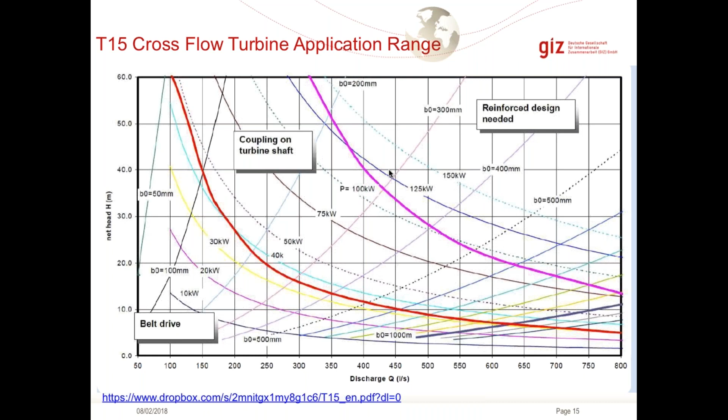So, support on MHP efficiency testing - I think this is my last slide. Since we have installed more than 270 MHPs, implementation of a testing and commissioning protocol is very important.

We have decided to again support PEDO, because PEDO recently requested us to do some kind of measurement of the installed MHPs. So we decided to hire an international consultant to visit Pakistan and provide training to PEDO's engineers and representatives, and also turbine manufacturers, to review the design of a few turbines and test them with their equipment - to see if it is as per standards or not, and provide any recommendations for improvement if needed.

About 25 representatives of PEDO will hopefully be trained in the month of April or May. We are planning to do that, and the contract is already in process.

There are key challenges, and one will be addressed by this: a testing and commissioning protocol will be developed by this consultant. Maintaining data logs and proper monitoring is also very important - you should have registers available in the powerhouse with proper data for the last year, hourly load or at least kilowatt hour consumption, load pattern, and any issues, suggestions, or repair and maintenance done should be properly recorded in the data register.

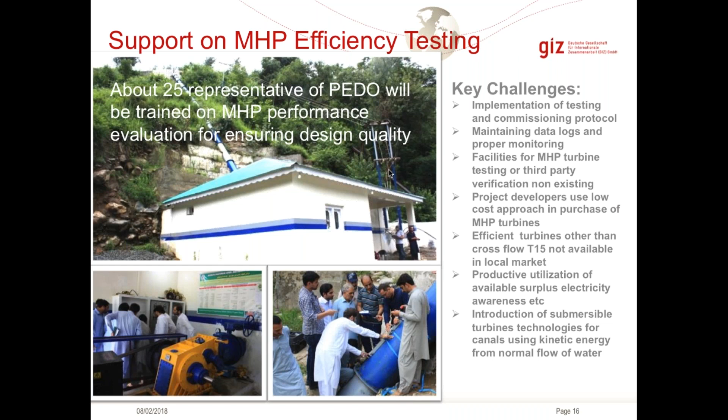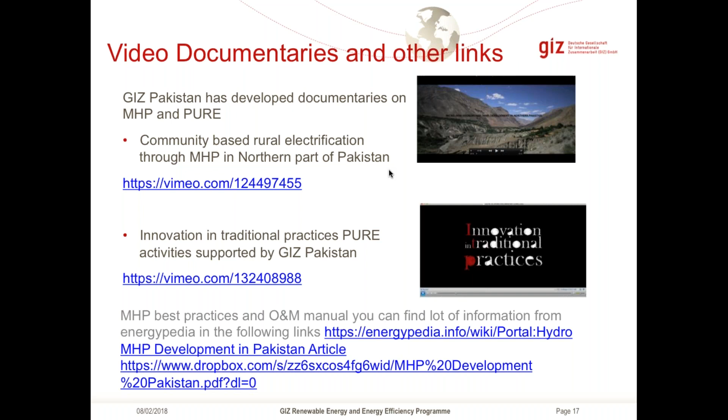As a knowledge-sharing effort, we developed some hydropower documentaries on community-based rural electrification. You can click on the link and watch those documentaries - it gives an overall MHP scenario in Pakistan. We also developed another documentary specifically on productive use of energy, showing our success in the northern part of Pakistan, mainly the Chitral area. There are best practices, an operation and maintenance manual, and a lot of information available on the Energypedia wiki. You need to sign up once with your Gmail or other email account, then you can easily get this information by clicking on the link. We also wrote an MHP article, and there's a Dropbox link for MHP Pakistan and other resources. I think this is all from my side - if you have any questions, I'll be happy to respond.

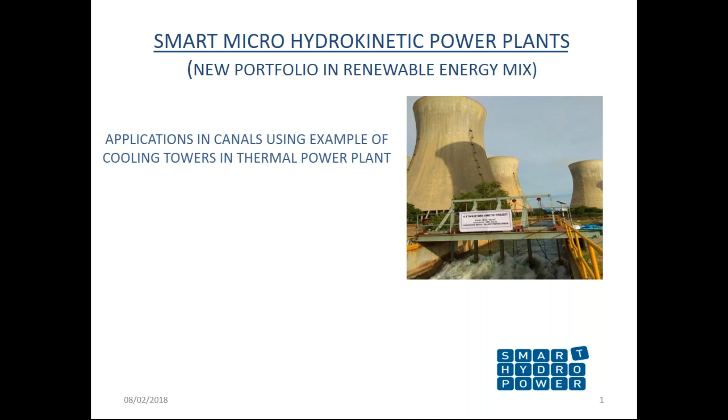Now we are changing the topic a little bit. While other hydropower technology needs quite a bit of infrastructure and needs a head to accelerate the flow through the tube, whatever turbine comes after that, now we are talking about kinetic hydropower. Kinetic hydropower means that you are using the natural flow only, be it canals or rivers. This also means that we are talking about smaller plants. I'm going first to present the company, then jump directly into an example, and after that show the market potential in a more general way. Who are we?

We are still a startup company from Germany. No Germans beside myself working with us, so it's quite an international group coming from all over the globe. We are founded mainly by German capital, including the KfW, which is a German development bank. You heard already a presentation of the GIZ, so again, it's a German development bank, which does not mean that we are funding our own projects. We always have to look for capital in the private market.

What we do is we design, build, and commercialize kinetic hydropower integrated in systems, mainly hybrid systems for distributed generation and for microgrids. The project I want to present is a project in a cooling canal behind a thermal power plant. It's a coal power plant in a huge mine. So that's a typical application of our technology. It's installed in running water. The plant is never shutting down the cooling canal of the mining plant.

The plant is grid synchronized, which means the plant load factor is much above 70%. So we are not talking about off-grid. We are talking about a complementary power plant to a larger power plant, giving low voltage power for all the low voltage applications of the plant. It's renewable base load 24/7 because it's hydro.

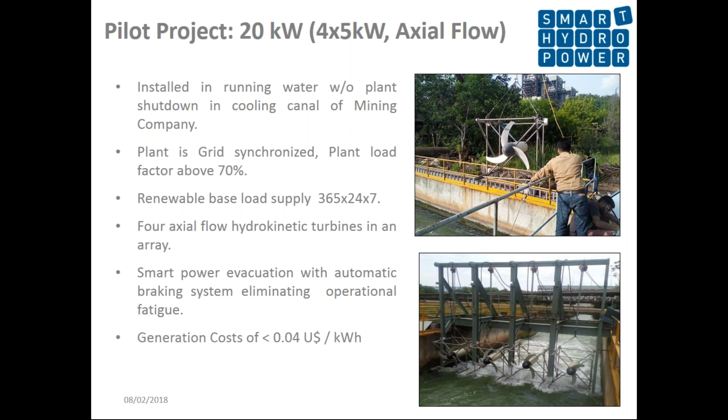How does kinetic hydropower look like? In our case, I admit this is our plant. There are few other fabricators of kinetic hydropower. It's still a very innovative and new technology. We are doing small standardized plants, small meaning 5 kilowatt each unit of an underwater generator with a permanent magnet, so you can work as well in not grid tied environments.

We are using a gearless driven generator because this reduces the need of servicing and maintenance. It's a maintenance free application. The only servicing is cleaning, as always with hydropower. Why have we chosen such a small plant? Because many times the flow is not higher than 2 or 2.5 meters per second, not the volume, the velocity, and many canals are only 1 to 2 meters deep. So we are using a standardized solution which can be applied in a modular way.

That's very important because standardization, you heard in the previous presentation, he briefly talked about the possibility to make it a locally fabricated unit. This is possible. Today we are fabricating in Germany. We are assembling in Germany using components from Hungary, from China, from all over the globe. You could do the same in other countries as well if there is sufficient market.

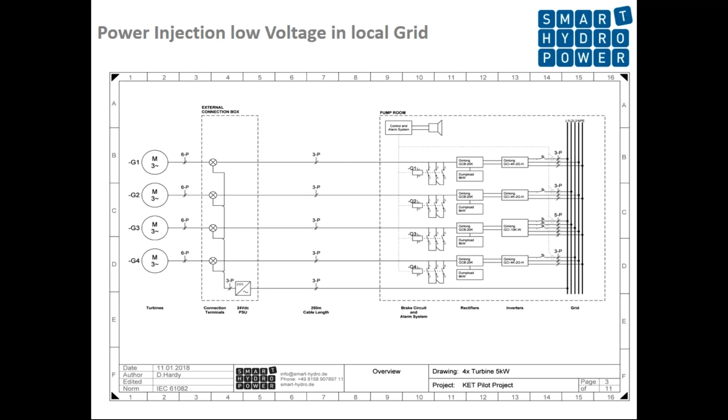and we are injecting close to those low voltage applications, which as well means that the grid structure is stabilized by the turbines because we are generating 24/7, different from PV or wind, which are fantastic and easy, but not 24/7, which means they always give a certain challenge to the grid. Different from that, hydrokinetic, easy to install, does stabilize the grid. It's an application mainly for the low voltage if you are not getting to much larger plants beyond the 50 kilowatt.

So the only two situations where you really need servicing of the plant is either the grid goes down, and if you do not have any alternative usage of the energy, then you have to shut down the plant. It's done automatically, but you have to control that it's really done. If not, inverters could be broken, as with all other electrical plants. And the other is if there is some debris in the water, you need to have a servicing cycle. You need a cleaning cycle.

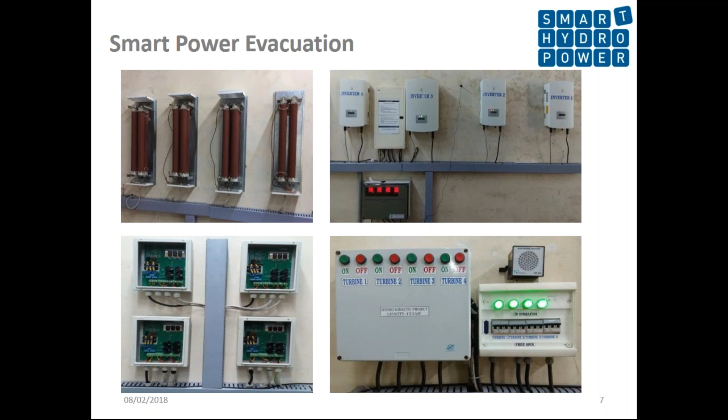What have we seen after 3 months running? Firstly, we really have seen that it works 24/7. This is very important. It really works as it was supposed to work. It's a complete 8,760 hours in a year solution. Again, this is important for the grid and it's important for the generation because you get low cost generation.

We've seen that in the canal, the flow is highest in the center. So therefore, we are generating differently with the turbines on the edge than with the turbines in the center. That could be done slightly more intelligently by having a different kind of structure employed in the canal. It depends on the flow of the canal and the easiness to employ infrastructure. In our case, as a mine, they have all the tools there to employ a simple infrastructure. So it was easy and inexpensive. In other cases, you would not employ such an elaborate infrastructure, but go for something even easier.

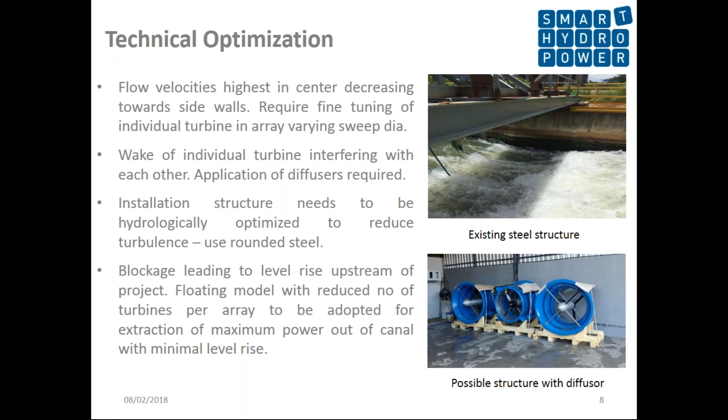So the modular design of this turbine allows you to really employ exactly what the specific site allows you to employ. So if it's 1 meter or 2 meters, it is one single line of turbines. If it's 4 meters or even more, you can employ a structure which allows you to have 2 rows not behind, but above each other, which duplicates your generation capacity.

What is the market? I was asked by the organizers to mention the market potential of this distributed generation. Again, it's kinetic hydropower. What you need is canals and rivers. In East Asia and Pakistan, there are millions of canals. Pakistan is the country with the most fast-running canals in the world. There are many other countries that have already employed hydropower plants or other kinds of generation where you could use the tail race or the cooling canal of those existing power plants. So there are different kinds of situations. You can use tail races, cooling canals, irrigation canals, if they are running faster than 2 meters per second. Again, it's not the volume, it's the velocity that is needed. And certainly you can use natural rivers.

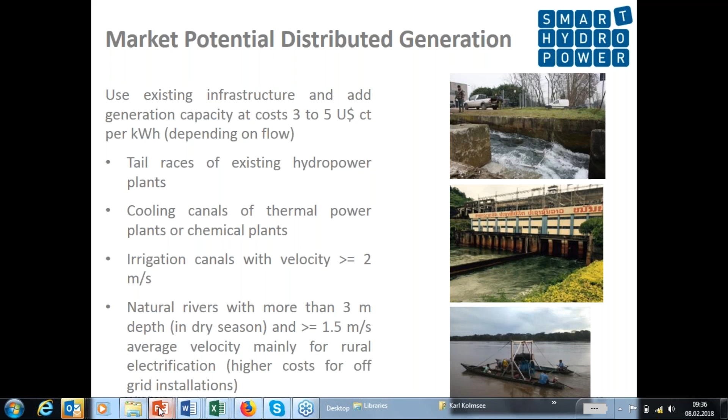During the melting period, you have a lot of stones running down the rivers and canals. So what you have to do is build those turbines with debris protection into the water. Using the debris protection, you can keep stones from getting to the blades. In these rivers, with a lot of stones being carried down, during the dry season you have to take away the stones again. So during the rainy or melting season, you don't have any problems with stones in front of the turbine.

The turbulence alone, as long as there is enough flow, does not really hinder the employment of kinetic hydropower. It's a problem when, like directly behind a hydropower plant in the tail race, you have turbulence caused by the diffusers going in the opposite direction, hindering the flow. As long as turbulence is always directed in one direction, it still pushes the blades and you don't have problems. But once turbulence goes in the opposite direction, you don't have the same kind of flow.